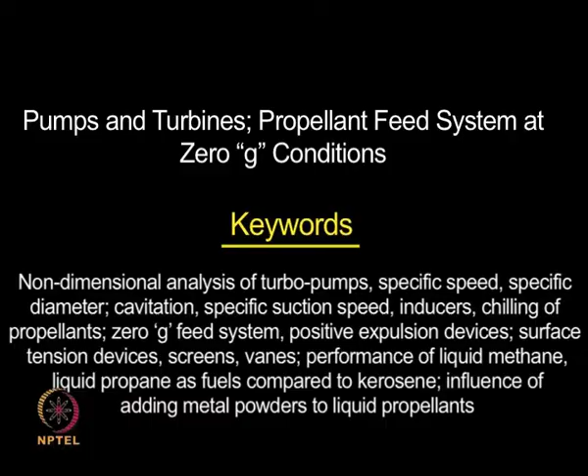Well, good morning then. We continue with what we were doing in the last class, namely we looked at the efficiency of C star due to distribution, then we calculated the time taken for a droplet to evaporate, we calculated the value of the evaporation constant lambda, and we said C star due to evaporation also I can calculate, and the total value of C star due to these two effects is equal to C star due to the distribution multiplied by C star due to vaporization, and this is all about it. You get the efficiencies. I want to spend a couple of minutes on this vaporization.

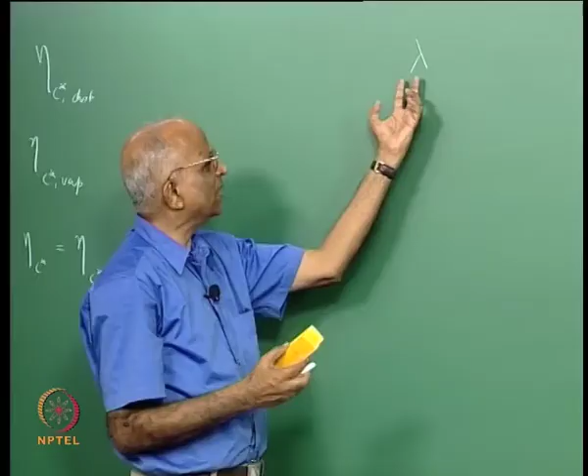See, we told ourselves lambda is a constant, it depends only on the properties of the fuel, and therefore lambda for a given fuel, like kerosene, is around 0.2 millimeter square per second. If I have a hydrazine droplet in a hot medium, it is almost 4 millimeter square per second. I can get the value of lambda. I can therefore say the time taken for a droplet is d naught square divided by lambda. d naught square has units of meter square, lambda has units of meter square per second, therefore d naught square by lambda gives me the value of vaporization time. And the question of lambda, the evaporation rate constant: why do I call it a constant?

We find d d square by dt is equal to lambda, which I call the evaporation rate constant. It does not depend on any parameter, not even on the diameter, it is just a function of the diffusion coefficient, density of the droplet and density of the medium, and therefore lambda tends to be a constant. Therefore, if you go to any lab which deals with combustion, they do experiments, they take a droplet and find out the time taken for vaporization, but then there is a complexity.

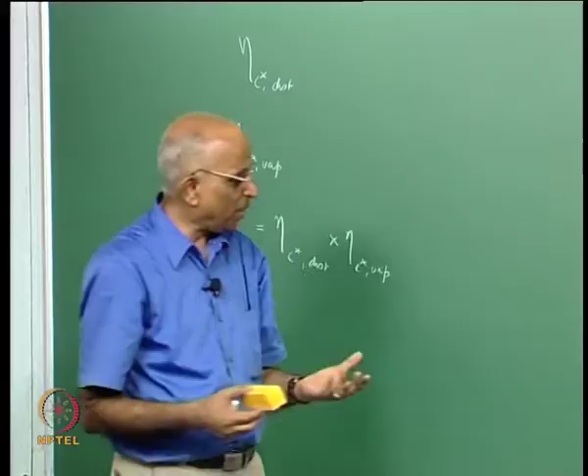This complexity comes whenever I have a droplet in a medium. When the medium is different, the droplet tends to absorb that gaseous medium on the surface, and therefore lambda is not really a constant at different pressures. At low pressures, it is a constant. At high pressures, we did some experiments, in fact one of your seniors by name Balaji did a series of computations on equilibrium at high pressures of liquid surfaces, calculated the value of lambda, and lambda at high pressure tends to decrease.

In fact, his work was published in Physics of Fluids, and that is what we do research work on in combustion: evaporation rate, mixing and stuff like that. We found that lambda decreases at high pressures, but again it picks up at very high pressures, and we also find that at high pressures a droplet may become equal to a gas. In other words, if I were to plot a phase diagram, maybe a T and V diagram, I have the solid line, I have this line which is a liquid line, I have the vaporization line, this is my critical point.

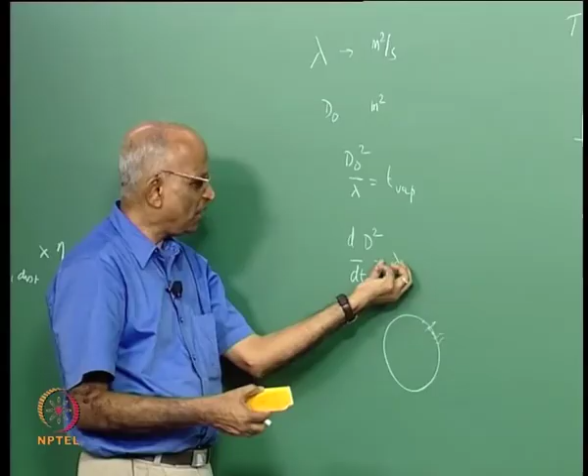When I approach the critical point, and this critical point is not very high, for kerosene in oxygen it could be as low as 50 bar, but I operate my chamber at very high pressures. At that time, oxygen gets dissolved on the surface, the critical pressure increases in this binary medium, and the droplet would still be in the subcritical case. Therefore this question of lambda is important, a lot of papers are written on it, and I think you all should have a feel for it. I think this is all I wanted to say.

I will not go into these details in a regular class, but let us now come to the second point, namely what we have done so far. Let us take a quick summary. We started with tankages. We said liquid propellants are pushed into the chamber. I could have either a regulated gas pressure mode, a pump fed mode, a blow down mode and all that.

Ultimately, what I did was bring the fuel and oxidizer into the chamber, we looked at the efficiencies, we looked at the chamber, we have already looked at the nozzles, but what we have really not looked at is some of these pumps and turbines. In a gas generator cycle, we said I increase the pressure and then I pass it over here.

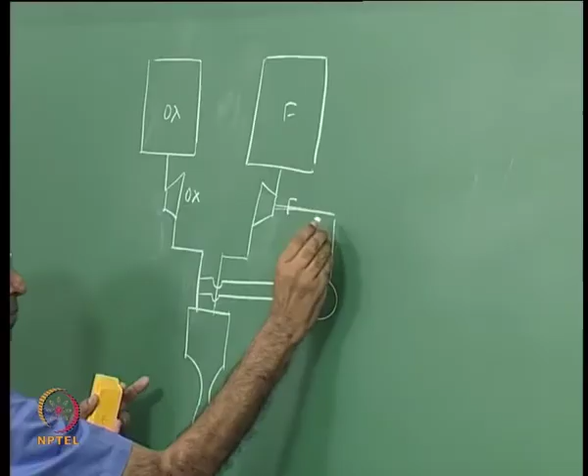Similarly here, what do I do? I put a pump over here and pump the liquid - maybe this is oxidizer liquid, this is fuel liquid, this is oxidizer pump, this is fuel pump. Then what did we do? We bled some amount of oxidizer and fuel, burnt it in a gas generator, and drove the two pumps by putting the gases into a turbine. I expanded the gases in the turbine, reducing pressure, generating power to drive the pumps. When I took the exhaust gases and put them back into the chamber, I called it staged combustion; when I allowed it to exit through an auxiliary nozzle, I called it a gas generator cycle.

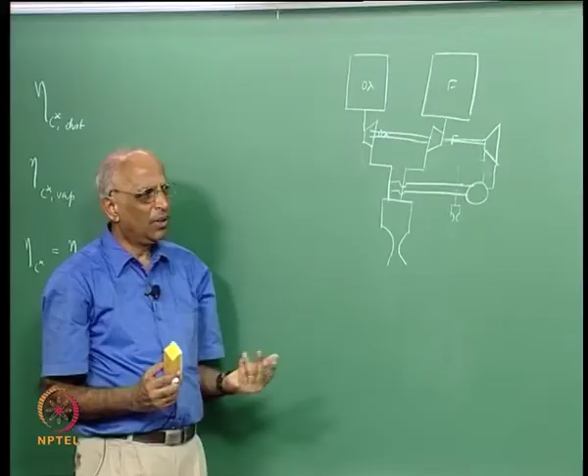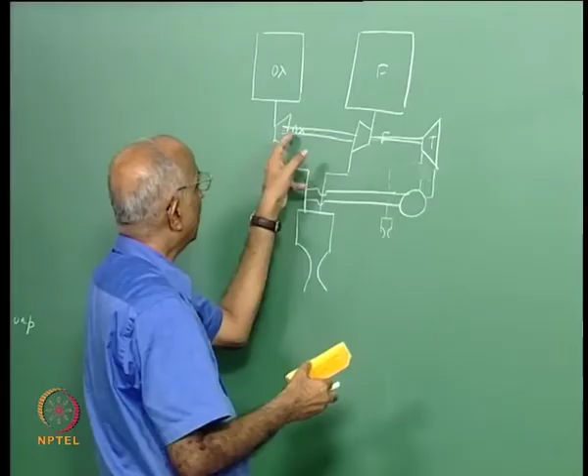So I should spend some time on these pumps and turbines. Normally the turbines we use are of the impulse type. Impulse type means velocity - I convert the enthalpy into high velocity gases. I have the enthalpy of the gases at the exit of the gas generator, at the inlet to the turbine, and at the outlet of the turbine. This enthalpy difference is converted into velocity, which impinges on the blades, rotates them, and drives the pumps. So the turbine is generally of impulse type.

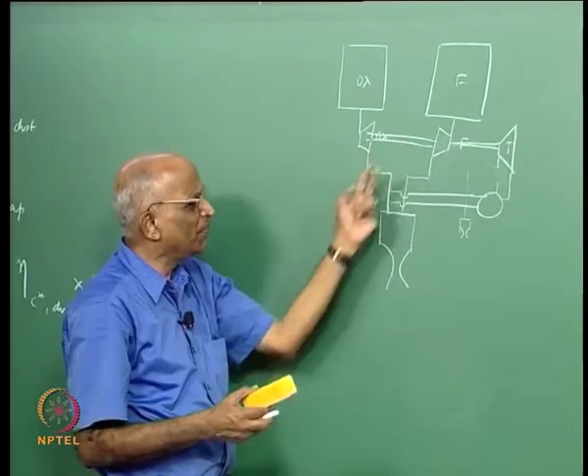Then I have the two pumps. If they are for a small engine, it could be a centrifugal one where I have small flow but need high pressure. It could be a series of axial flow pumps, or a combination of centrifugal and radial and axial. Several possibilities exist for a pump. If you go into details of pumps and turbines it becomes an exercise in turbo machines, which I won't go through, but I want to do some justice to pumps and turbines.

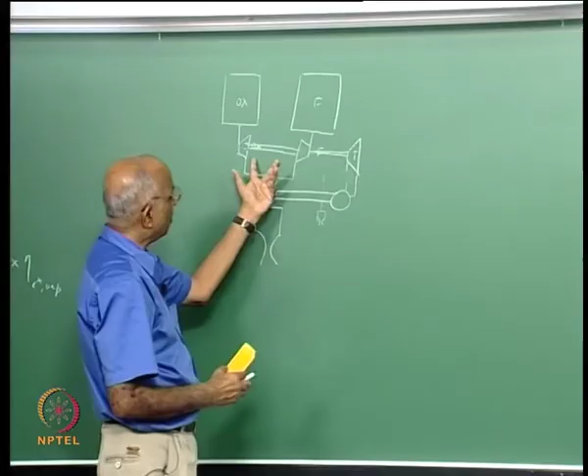So what is a pump required to do? A pump must generate some pressure. What are the parameters in a pump? Maybe the speed of the pump, n rpm - pumps generally rotate at very high speeds of the order of 20,000 to 60,000. In fact, a new engine called Vinci runs at almost 1 lakh rpm. Why do we need high rpm? My dimensions must be small, so my speed must be large to get high pressure. So one factor is n rpm.

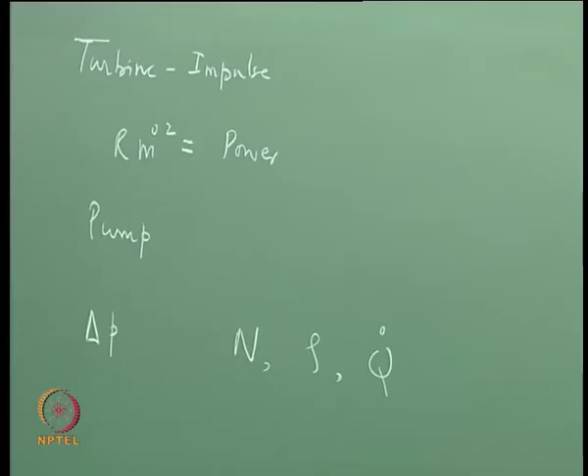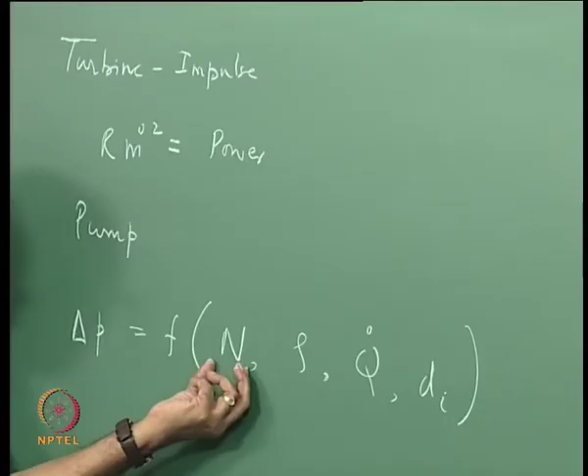What are these 5 parameters? Delta P across the pump, the density, the flow rate, the speed - instead of writing n rpm, I put it in terms of radians per second, omega, where 2 pi n equals omega. And the last parameter is the diameter, d.

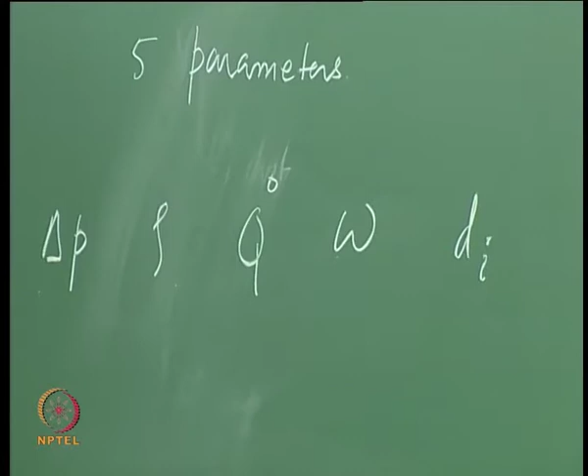Now I want to find the influence of all these things on delta P and vice versa. How do I approach a complicated engineering problem involving a number of parameters? Through dimensional analysis - we have to do a non-dimensionalization or dimensional analysis. Let us do this, so we can say we studied pumps through a dimensional analysis procedure.

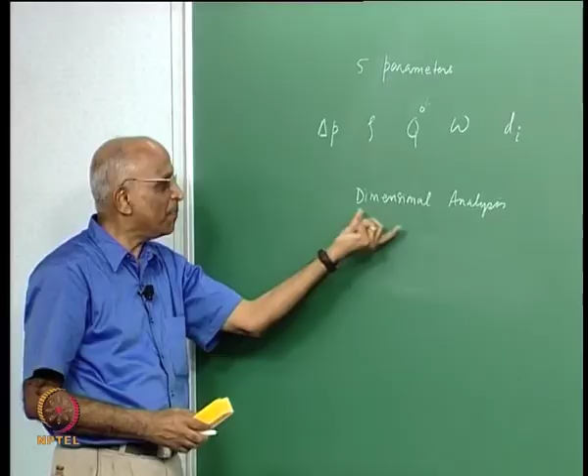In other words, I'm looking at the Buckingham pi theorem, and I have 5 parameters for the problem. The Buckingham pi theorem tells me that if I have a problem involving m parameters with n primary dimensions, I can form m minus n non-dimensional groups.

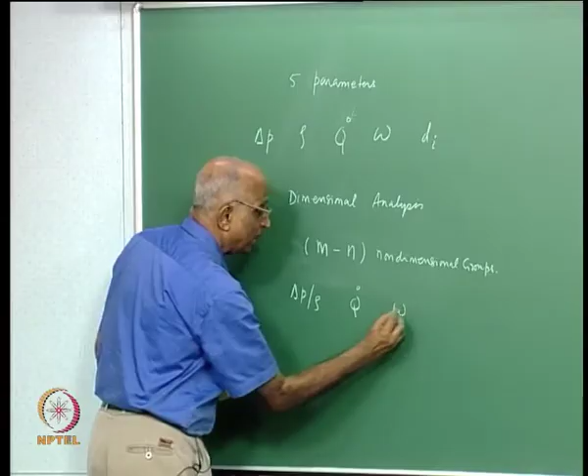Right? This is Buckingham pi theorem. Therefore, what are the primary dimensions I am talking of? Well, when I look at this problem, delta p and rho is a combination. Then I am looking at maybe q dot, maybe omega, and di. Let us put the dimensions out: delta p by rho is Newton per meter square by kilogram per meter cube, but Newton is equal to kilogram meter per second square.

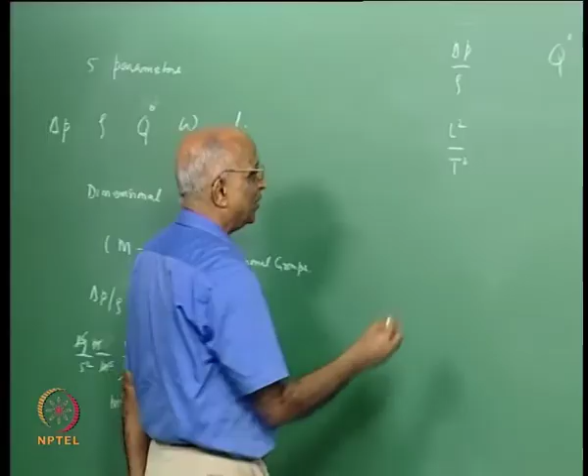Therefore, this gives me the unit as meter square by second square. Let's put down the primary dimensions now. The primary dimensions for this problem: delta p by rho has unit of L squared by T square, length by time square. Q dot has dimensions of meter cube per second, that is L cube by T. Omega is 1 by T, and we have di which is equal to L.

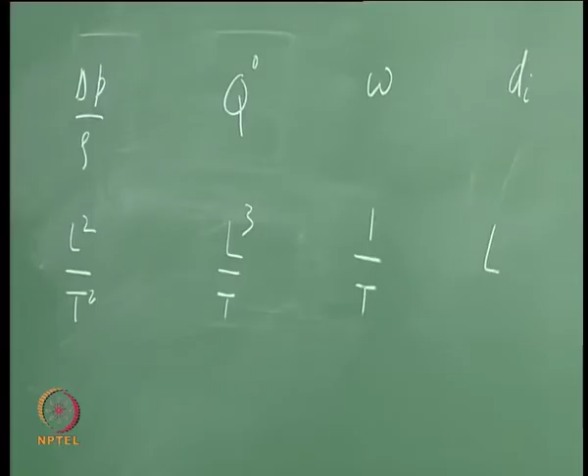See, I was very particular to do this dimensional analysis because in any subject we must know how it applies and we must be able to draw the conclusion, and here also we have a pump which involves some parameters. Therefore, how many fundamental dimensions do you have? L and T alone, that means 2 fundamental dimensions, and the number of parameters I have are 5. Therefore, I should be able to get 3 non-dimensional parameters. For the case of pumps and turbines put together, or let us say a turbo pump, I want to develop pi 1, pi 2, pi 3.

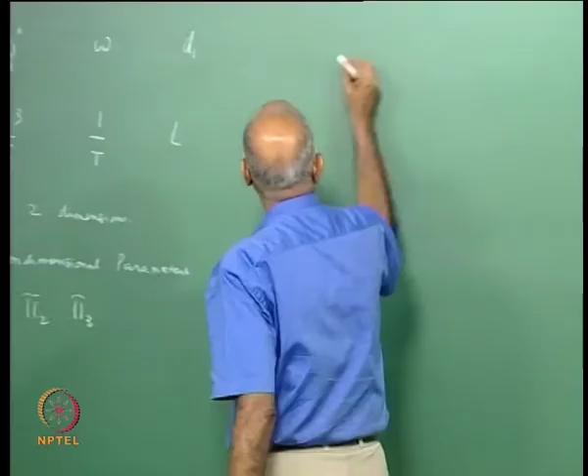Then let's derive these pi 1, pi 2, pi 3, and then try to analyze, and let's see how we can describe a turbo pump operation and how to go about making a turbo pump. Well, I go back and look at the problem. My 5 parameters are delta p, q dot, omega, di, and rho. Even without doing a non-dimensional parameter, I can say delta p by rho v square has units of pressure, and therefore one non-dimensional parameter could readily be delta p by rho into omega square di square.

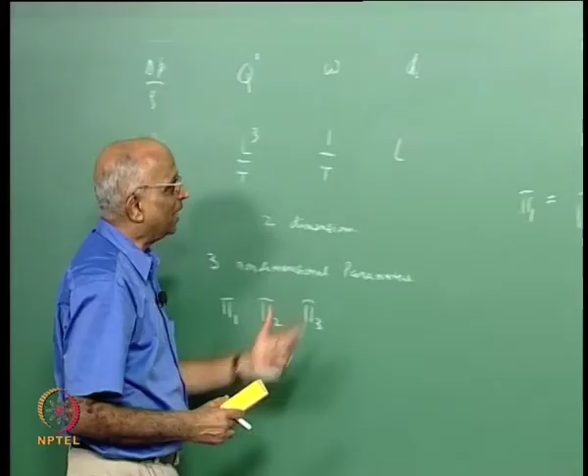Just by observation. Why is that? I know rho v square has units of pressure, kilogram per meter cube, then again meter square by second square, this gives me Newton per meter square. Therefore, let's do one by observation, and let's do one by detailed analysis. Delta p by rho can be put in terms of a non-dimensional parameter, delta p by rho omega square di square, which is my first non-dimensional term. Let us do the second non-dimensionalization with q dot.

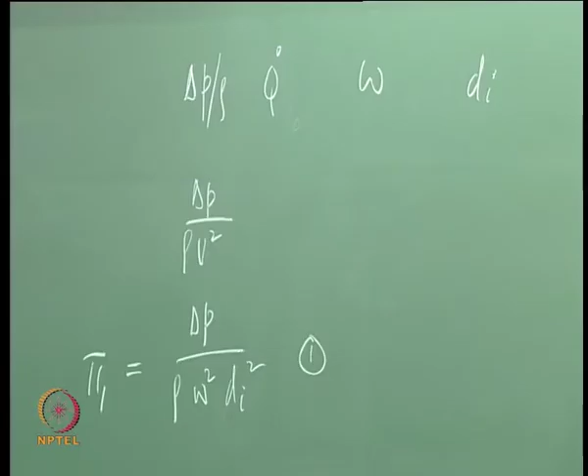I have q dot, then I say, well, delta p by rho should also cause variation in q dot. Well, I have omega, I have to some extent already taken di in this, so let me put di as equal to 0. Let me not consider di, not being influenced, or rather I am looking at non-dimensionalizing the value of the flow rate in terms of, let us say, delta p by rho to the power a into omega to the power b, which I want to write as pi 2, because I am going to separately look at di a little later. If I were to look at this, what would I get? Should I really take this over here, or should I take something over here? Why should omega come over here?

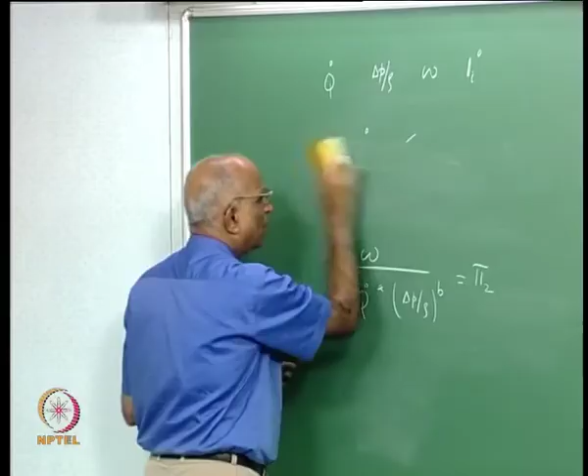Let me consider again, instead of putting q dot, if I am interested in omega over here, and then I put omega in terms of q dot to the power a, and let us put the other term delta p by rho to the power b, this could also be a non-dimensional parameter. In other words, I would like some non-dimensionalizing to be done for the speed of the system as a function of flow rate, and whether I can derive a non-dimensional term here, that means I consider pi 2 to be here rather than this value. If I were to now erase it out and say my pi 2 is going to be here, what should be my value of a and b? How do I do this?

I say omega has units of 1 over t, then q we just now told is units of L cube by t, meter cube per second to the power a, delta p by rho we had L squared by t square to the power b. This should give me a non-dimensional parameter, let us say pi 2 over here, it is non-dimensional. Now what should be my choice of a and b in this for it to be non-dimensional? Let us solve it.

If I solve for L, I get minus 3a minus 2b is equal to 0, because I want the net term to be non-dimensional, not depending on L and t. If I write the equation for t, I get minus 1, then plus a minus plus 2b, bringing t on top, t to the power a and t to the power 2b, minus 1 is equal to 0.

Therefore what do I get? I get 2b is equal to minus 3a. If 2b is equal to minus 3a, I get minus 1 plus a minus 3a is equal to 0, or rather a is equal to half. If a is equal to half, the value of b should be equal to what?

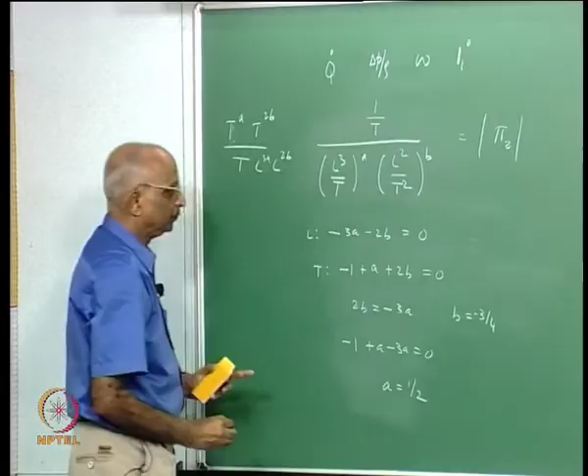If a is equal to half, then the value of b is equal to 3 by 4 minus 3 by 4, minus and minus, that means I am getting, is it all right?

Let us do minus 1 plus a, and 2b is equal to minus 3a, I have taken it on the other side minus 3a, therefore a is equal to minus 2a minus, here I am getting minus 2a minus 1 is equal to 0, that means minus 1 minus 2a is equal to 0, or rather I get 2a is equal to minus 1, therefore a is equal to minus half. If a is equal to minus half, the value of b is equal to plus 3 by 4.

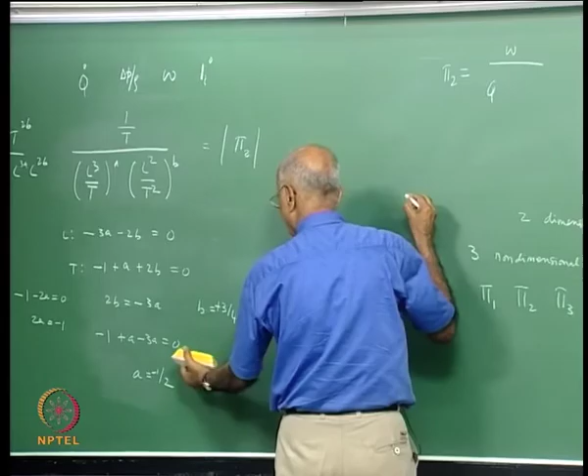Therefore what will be my expression pi 2? Pi 2 is equal to, I get the value of omega on top, this was my q to the power a, which is minus half, and I have b is equal to delta p by rho to the power plus 3 by 4, or rather this tells me that the value is equal to omega root q dot, divided by delta p by rho to the power 3 by 4, and this pi 2 is what we call as a non-dimensional speed or a specific speed.

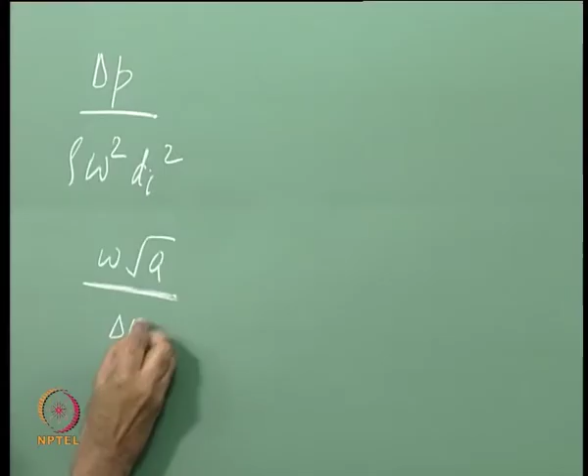Therefore I have got the second parameter. Let us put down the parameters together. The first parameter I said pi 1 is equal to delta p by rho omega square di square. The second parameter says omega under root q dot divided by the value of delta p by rho to the power 3 by 4, which I now call as specific speed.

I do the same analysis for finding out the non-dimensional di, and therefore I do this, and what is it I get? I will not do it in class, maybe you take it as a homework problem. Therefore I take the value of pi 3, let us put it down here, this was pi 1, this was pi 2 which we call as specific speed, the value of pi 3 we will call as specific diameter, and that will come out to be equal to, I just write it out, the same thing we will follow and do it, otherwise it will eat into our class time.

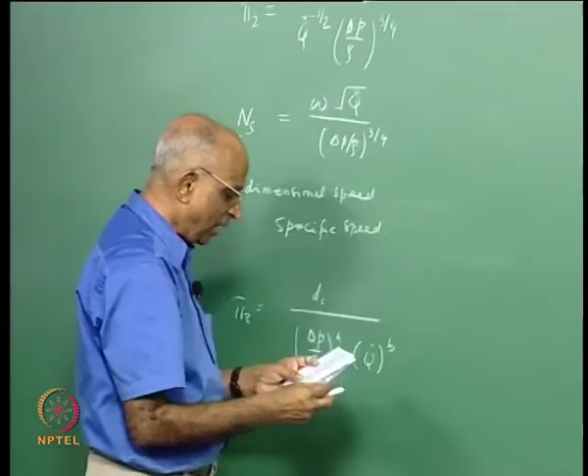We call it as, we do the same exercise, all what I am saying is we will again write di. Pi 3 is equal to di divided by delta p by rho to the power a into q dot to the power b, evaluate a and b for I get a term like this, and the value what we will get is di into delta p by rho to the power 1 by 4 divided by under root q dot, flow rate.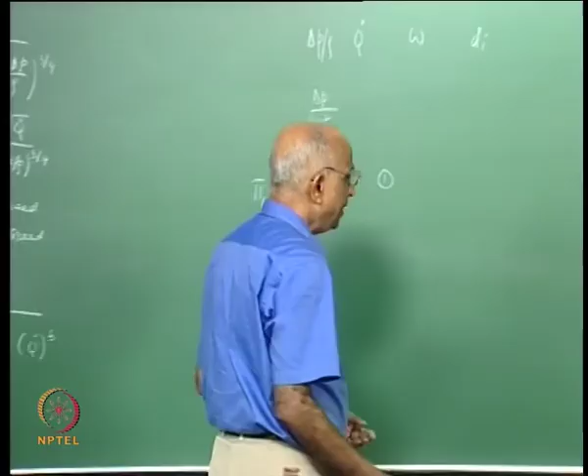Well, these are the three non-dimensional parameters, we call it as ND or specific diameter.

The performance of the pump can be expressed as pi 1, this parameter, as a function of the specific speed and the specific diameter, and this is how we non-dimensionalize the parameter. But why did we non-dimensionalize it?

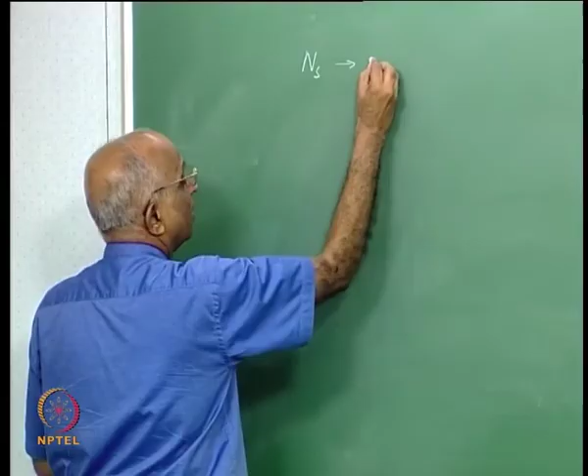Let us take one of the non-dimensional parameters and see what is the impact and why we are doing all this. The specific speed ns is given by omega root q dot by delta p by rho to the power 3 by 4, and I call it the specific speed. If I say the specific speed of a turbo machine is something like 0.6, what does it denote? Why is it so important?

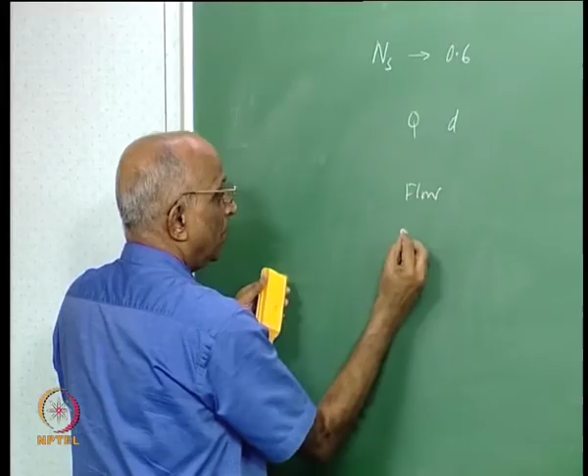This non-dimensional parameter tells me that for a given value of this diameter, if I were to scale up my diameter, I have to scale up the value of q, I scale up the value of the dimension. All I am saying is for a pump having the same value corresponding to different sizes and different values of speed, the flow in the pump and the geometrical characteristics of the pump will be similar.

In other words, for the same non-dimensional number, that is the same speed, if that non-dimensional speed is so much, then I can assume for different values of q, different values of diameter, for a given type, it could be axial, it could be handling a particular type of propellant, or it could be centrifugal, or a combination of some of these things.

For a given axial flow machine handling a particular set of propellants, if I keep on varying the quantities and vary the size of it, and if I get across a given number over here, the number is invariant. It shows that between the different types, that is one category of, let us say, an axial pump, if the size is varied,

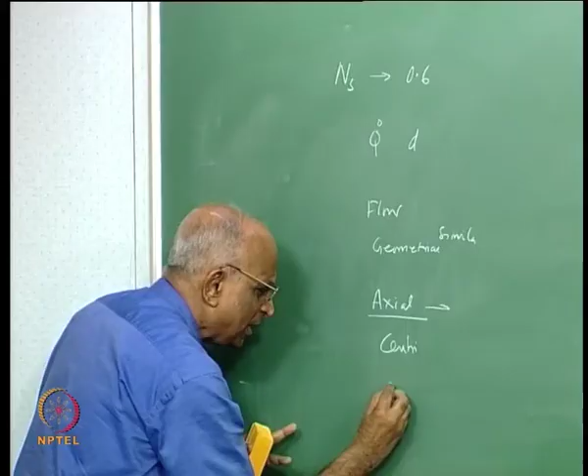automatically q and d will get varied and speed will vary, q dot and d will get varied. But if the specific speed is the same, the flow characteristics and the geometrical similarity will be there. Therefore in all the pumps and systems we use, for a given, let us say, cryogenic pump, if it is axial flow, it will have ns between a small range of values.

If I were to say the nd, that is the specific diameter, it will have a small range of variables. Therefore, if I have to scale up a cryogenic pump still using the axial pump, I will go ahead and design for this particular value of specific speed. Therefore these non-dimensional parameters are powerful because they allow us to determine the range of operation of a particular system.

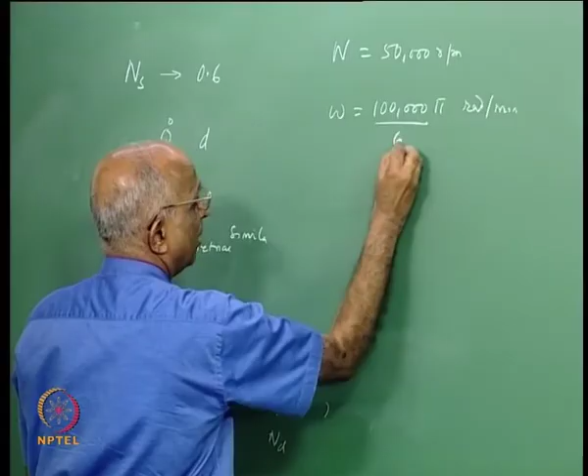Like we said, the speed of a pump may be 50,000 rpm, so omega is equal to, let us say, 100,000 pi radians per minute. To convert it to radians per second, I divide it by 60 and I get so much radians per second.

And therefore, for this radians per second, if I were to get the equivalent value of ns, how did I get the value of ns? I get omega, and for that particular machine or pump, I find out the flow rate, I find out the pressure head developed by it, and I get the value of ns.

Now if I were to design another pump which has to cater for a much larger flow rate and a different size, if I get the same value of ns, well, the flow characteristics, that is the nature of flow in the system, the hydraulics in the pump, and also the geometrical characteristics will be similar. Therefore, for a given type of pump, let us say axial pump, for a given type of propellant, the ns will fall in a very small range, maybe 0.6 to 0.7, and therefore these numbers are useful.

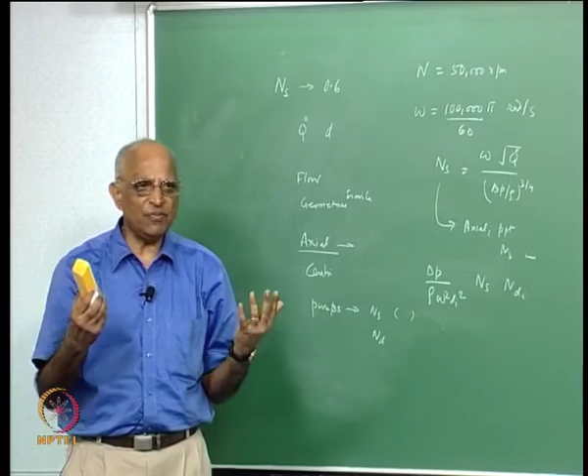Also the performance can be written in terms of ns, in terms of nd, in terms of delta p by rho omega square into d square, and this is why non-dimensionalization is useful. Whenever we plot the results of pumps and turbines, we always plot it as a function of specific speed. Anyway, it's one number in terms of delta p versus specific speed, and that is how the performance of pumps is measured.

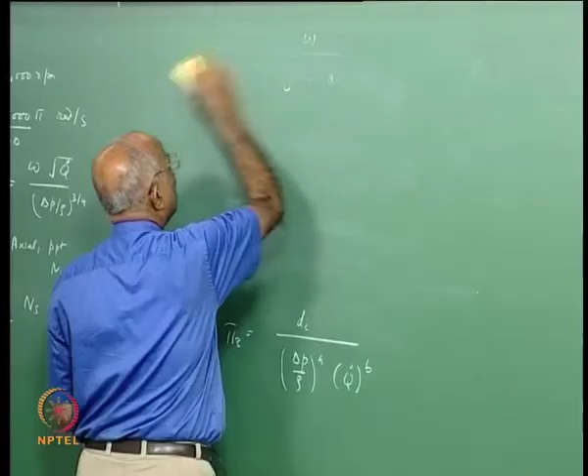This brings us to the next part of our talk. We looked at the pumps and turbines from a non-dimensionalizing point of view. The question is, what are the characteristics, what are the problems with pumps?

We told ourselves, I take the propellant from a tank into a pump. I cannot have high pressure in the tank, maybe the pressure here is, let us say, 5 atmospheres, which is the upper limit. Now I feed the propellant into the pump here and take the outlet from here. This is inlet, this is outlet.

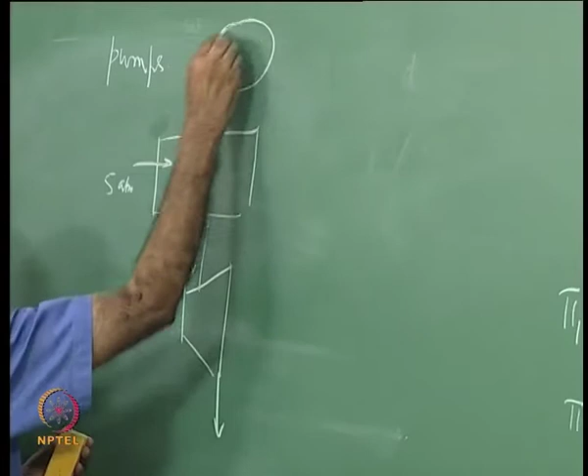There is a maximum pressure at which I can supply, because I have to carry a gas bottle here. If I have to increase my pressure, I have to increase the gas, which is not possible. Therefore, my pressure at the inlet cannot be high.

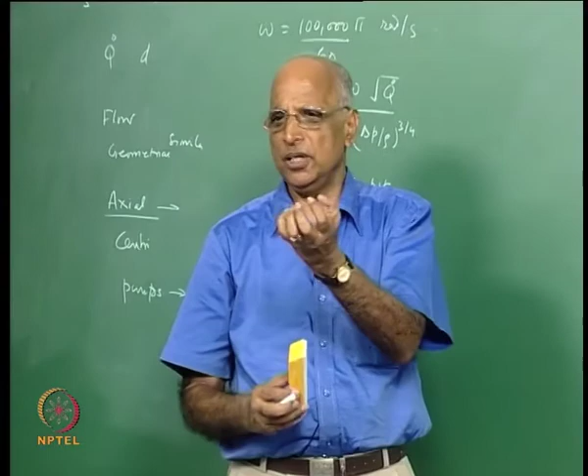Now if the pump is to rotate at very high speed, the velocity of the blades will be high. If the velocity of the blade is high, then the static pressure will be low. If the static pressure falls below the vapor pressure, bubbles of vapor are formed, and these bubbles will harm the blade. It will immediately go. We are rotating at high speed, and these bubbles hit the blade, and the blade gets damaged.

Therefore, the pump is subject to cavitation, and in any pump it is necessary for us to reduce the cavitation. To eliminate the possibilities of cavitation, how do we eliminate it?

My supply pressure, or the stagnation pressure at supply, which I call P naught — we are talking of a case when the maximum could be 5 atmosphere — minus the vapor pressure should be a large number, right? But this number depends on the speed of the pump.

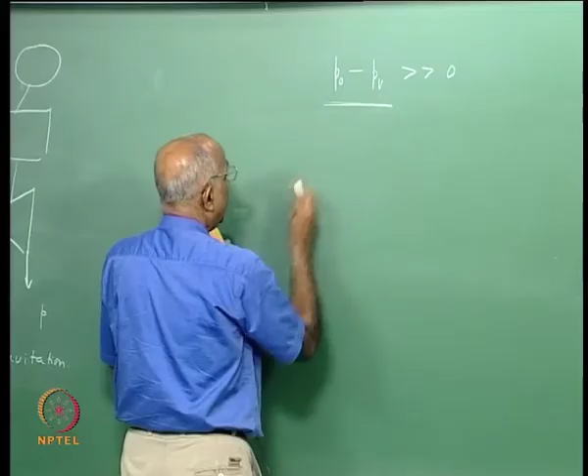If omega is larger, well my PV is the same. What happens is the static pressure reduces to this value, and therefore my cavitation would start. This number becomes extremely important, and we call it the net positive suction head, given by P naught minus PV, which must be a large number for any pump.

Is it clear? Why we say I would like the net positive suction head — that is P naught minus the vapor pressure, which we call net positive suction head equals P naught minus PV — or I can write this net positive suction head in terms of rho and g as P naught minus PV by rho g, which is the head, the net positive suction head.

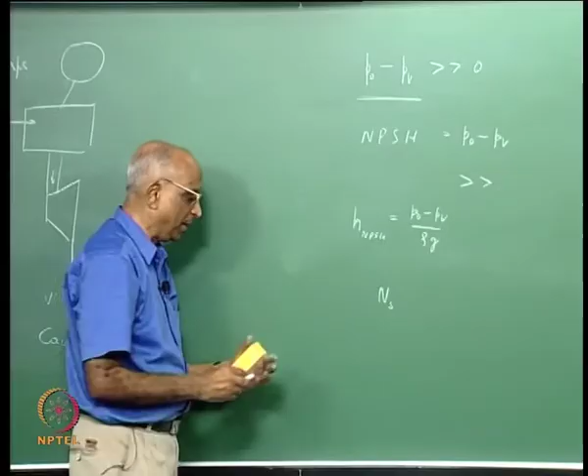And if I take this head, which I know for cavitation needs a reasonable number, and substitute it into the non-dimensional parameter pi 2, which we call specific speed — what was specific speed equal to? It was equal to omega root q dot divided by delta p by rho.

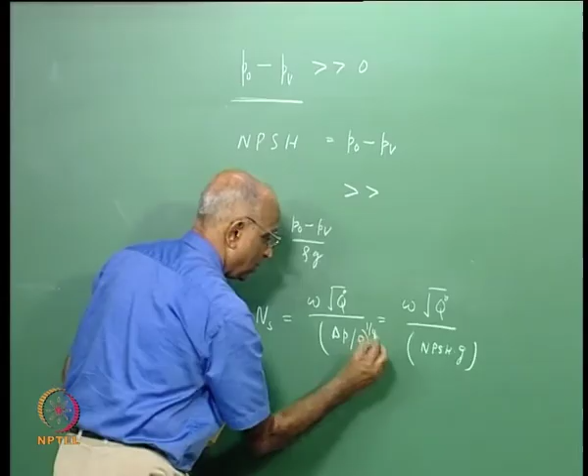I substitute delta p by rho, whatever I am getting at the pump inlet, as equal to something like omega root q dot divided by net positive suction head into the value of g, to the power 3 by 4 — I'm sorry, I gobbled that up. This value is what is referred to as

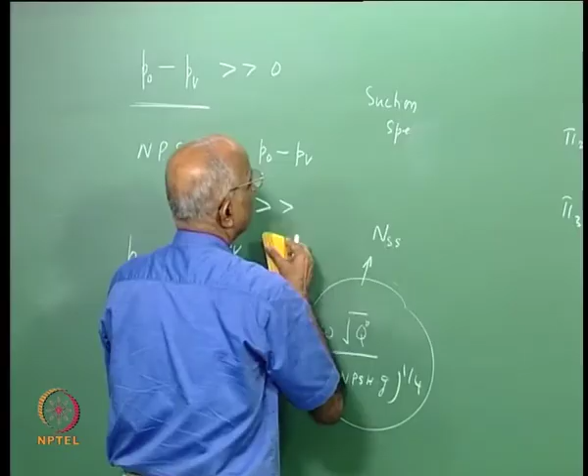NSS, that is, the suction specific speed for preventing cavitation. This head value must be such that cavitation does not occur, and we say this is equal to a non-dimensional number with respect to cavitation. We call it, instead of writing it as NS, which was the specific speed, we say suction specific speed, NSS.

Now, all what I am trying to say is cavitation is an important parameter. We would like the net positive suction head to be large, and this NSS gives you an idea of what we need to do to make this a large number, or rather the specific speed must come down under the suction conditions. We tell ourselves, well, I would like the value of P naught minus the vapor pressure to be a large number. How can you make this?

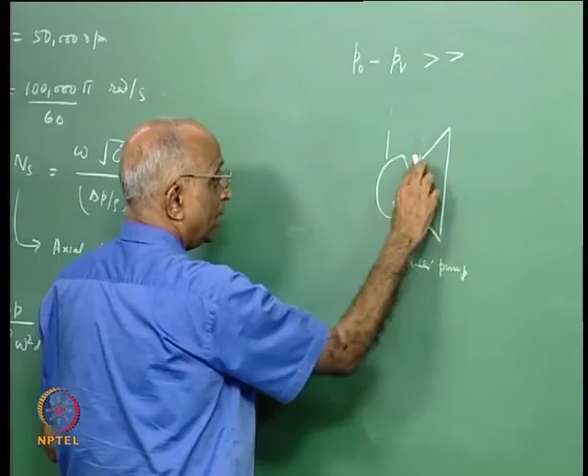Either the tank pressure must be increased, or else if I can subcool my liquid, the vapor pressure comes down and I can still get a larger number. Or the third thing is, before the pump — I have a pump like this, I supply it — before the pump I put another pump which I call an inducer pump, such that when the main pump is rotating at very high speed, I get a higher value of P naught. That means I can improve the net positive suction head.

By the following three: either provide high pressure tankages, which is not the correct solution, which is not possible. Second is lower the temperature of the propellants, in which case I reduce the value of PV, or I put something like an inducer ahead of the main pump.

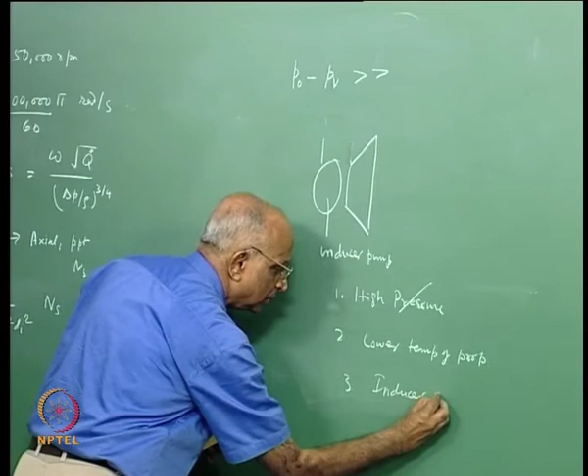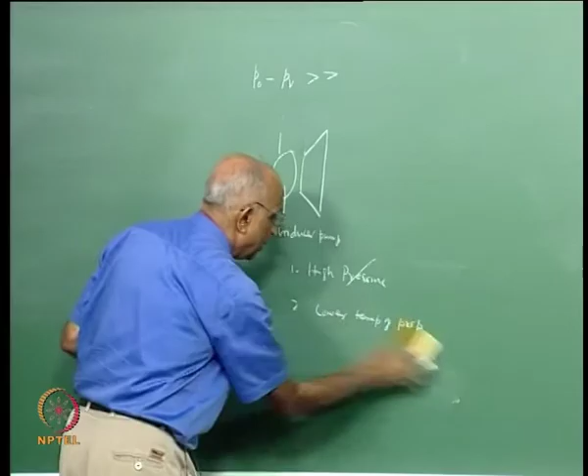Therefore, people who work with liquid propellant rockets will talk of an inducer ahead of a pump, and this is the reason why it is done. I think this is all about turbines and pumps. We reduce the problem to one of non-dimensionalization. We talked in terms of a specific diameter, we talked in terms of a specific speed, and said there will be similarity when the non-dimensional parameters are the same, and we will be able to quantify the performance, and normally the performance is always expressed in terms of these non-dimensional parameters.

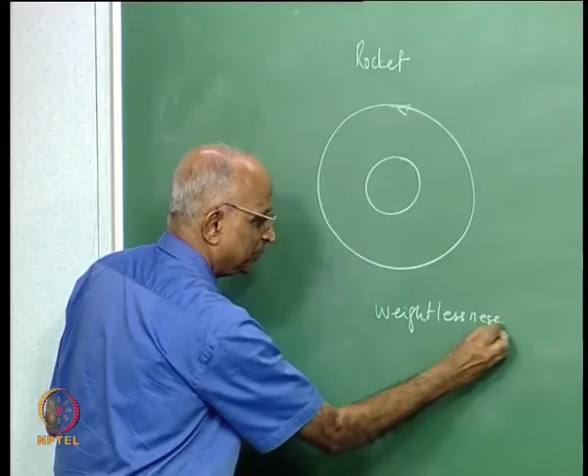I think with this background of turbines and pumps, let us come to the last topic, and I have been telling you earlier, whenever we have something like a rocket which is going up, and one of the functions of rockets is, maybe you have the earth, the satellite must go around the earth in some orbit, and we said orbits are something like freely falling bodies. We also told ourselves all freely falling bodies have a problem in that they are in a state of weightlessness, right. Is it clear? We talked about it.

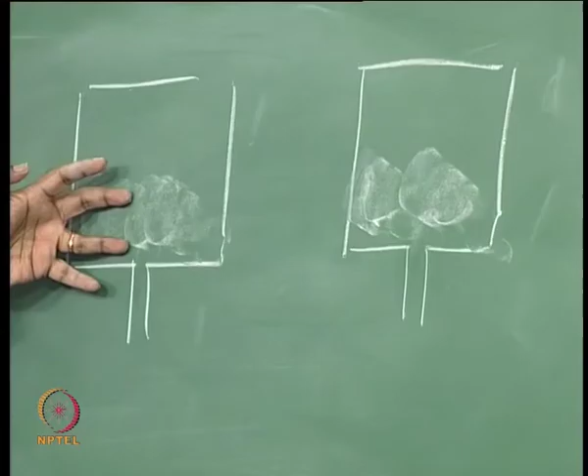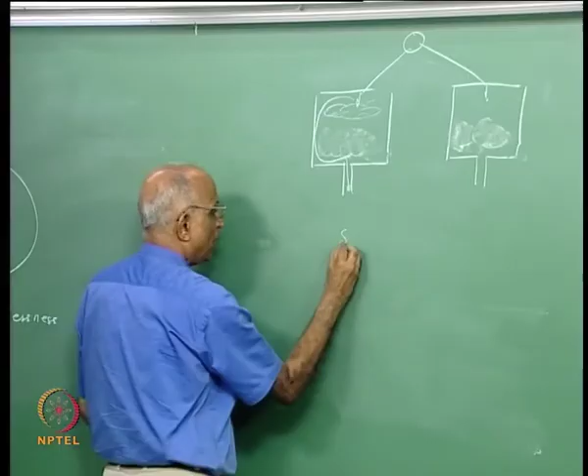Then now the question comes, I have a propellant tank, maybe a liquid fuel tank, an oxidizer fuel tank. Well, the liquid is at the bottom of the tank. I have a drain port through which I am drawing the liquid. If the rocket, as it is going with the satellite, or when the rocket is moving up, is just coasting such that it is again in a state of weightlessness, it is not powered, then the liquid is not going to be at the bottom here, it could be anywhere, it could be distributed anywhere. And if it is distributed anywhere, even if I put a gas over here and push the gas to push the liquid, gas will come out through this rather than the liquid. Therefore, supply of a liquid under the conditions of, let us say, weightlessness is something to be taken care of.

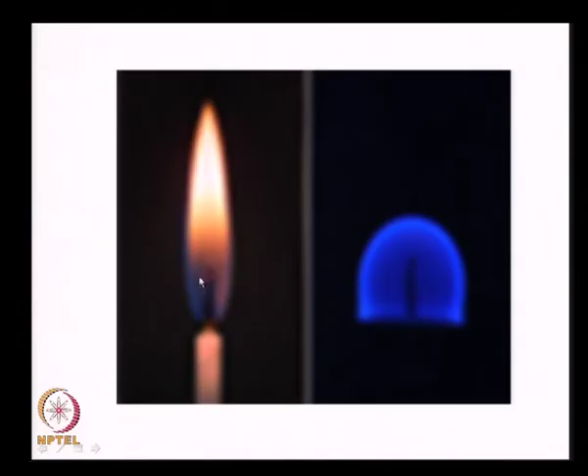All of us being in combustion, this is how a candle flame looks like on ground, but if the same candle I light when it is in a state of 0 G, that is weightlessness, I get a beautiful picture like this. That means there is no buoyancy, because buoyancy depends on gravity. Since there is no buoyancy, the flame is beautifully a hemisphere over here. And this is the state, and therefore let us now come back to our problem of how do I supply propellants when I am in a state of weightlessness, and that is something which we have to do.

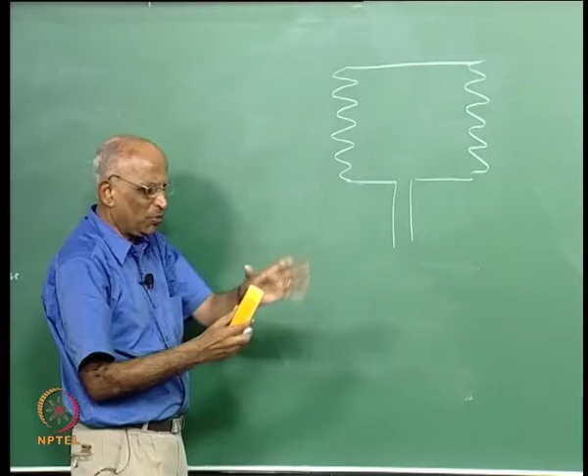You have something like an elastic material, like the football bladder, something made of rubber, something like this harmonium in which we compress things. That is a diaphragm, and this is something which gets squeezed. I put this in a propellant tank over here, and enclose the propellant completely within. Now I pressurize it with a gas, and this compresses the diaphragm, and the diaphragm as it compresses

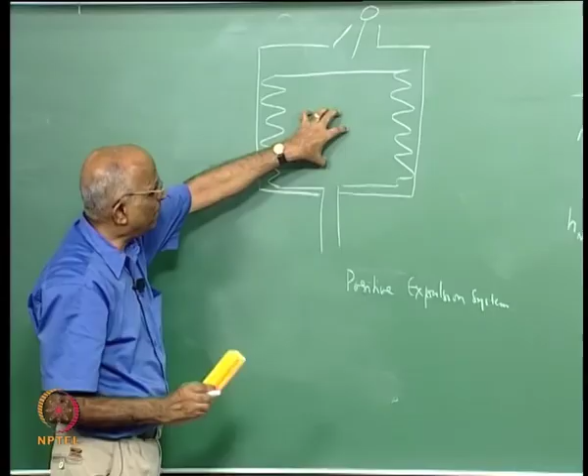keeps flowing. That means I contain the liquid positively, and this is known as a positive expulsion system. I cannot leave the liquid free. I have the tankage, but within the tankage I must put a diaphragm, and in the diaphragm I store the liquid fully. There is no gas at all, no vapor at all, and I positively push it through and the fuel gets expelled either into a pump or directly into the thrust chamber. That means both my tanks will consist of a diaphragm, which is a positive expulsion system.

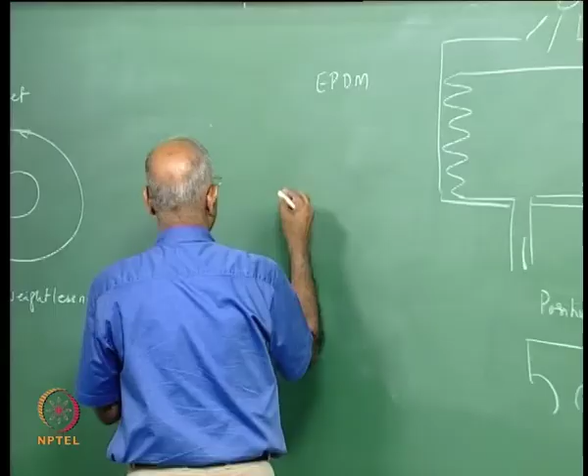Now the diaphragm must be a very flexible material. One of the materials used is EPDM rubber, which is more or less universally used. What is this EPDM? It is a rubber type, known as ethylene propylene diene monomer.

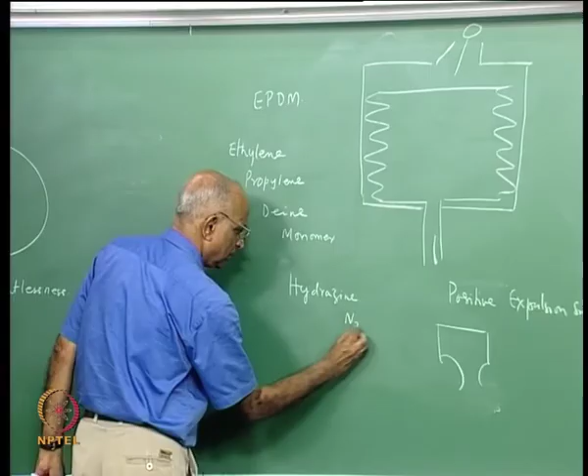Why this rubber is chosen is that most of the upper stages, or let us say the rocket stages used in spacecraft, use the fuel hydrazine, or MMH, monomethyl hydrazine, which is a hydrazine-based fuel. This particular diaphragm material should not get dissolved in it, because if it gets dissolved, even trace quantities may affect the performance later. We will study this maybe in the next class, wherein I will deal with monopropellant thrusters.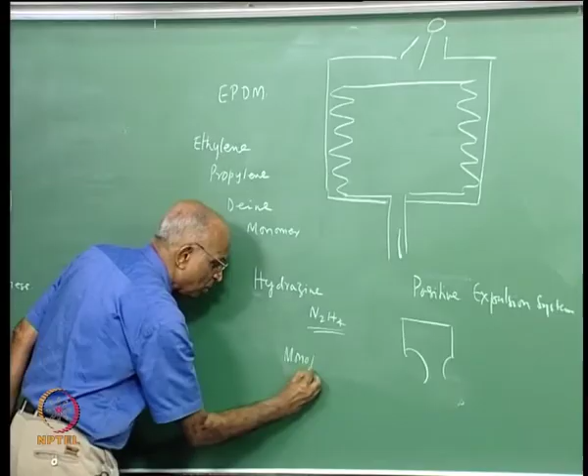A single propellant, can I use it for a rocket? What happens is, this will go and poison the catalyst, and the catalyst will degrade, and therefore the general tendency is to use EPDM rubber for the positive expulsion system. But the positive expulsion system has its own problems. You have this rubber diaphragm material, and it occupies a volume, with the result that the usable space is not fully used. That means the entire tank space cannot be filled with the liquid; I am losing something.

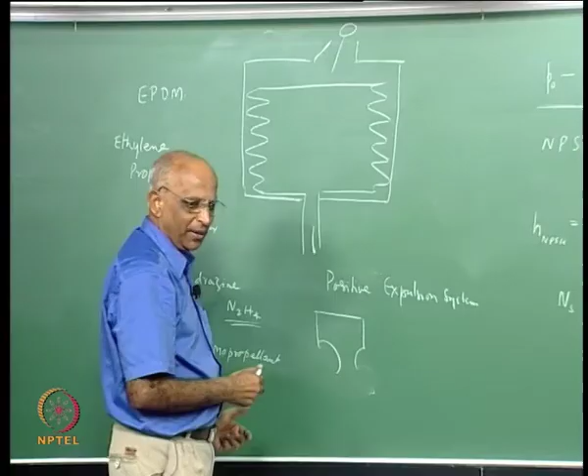Therefore the current trend, or what I must say is the more recent generation, by more recent I mean for the last 15 years or so, if not more, is to use surface tension devices for feeding propellants, liquid propellants, let us say at zero gravity conditions.

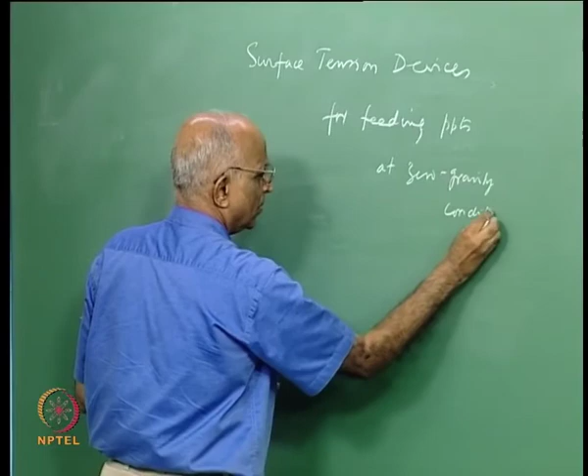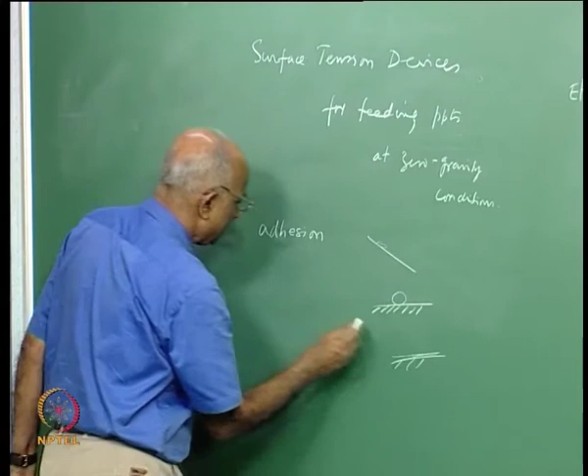All of us know what surface tension is. A surface, when wetted, things stick to it. Why does something have to stick to the surface? Well, you talk in terms of adhesion. I have a surface of a metal, I put a mercury drop, and the mercury drop stays as a drop; it does not smear on the surface. If I put water on a surface, it smears. That means surface adhesion takes place. In the mercury case, something like cohesion takes place. We do not want cohesion, but want the liquid to spread.

It is not only the properties of the liquid, but the properties of the surface of the material that are equally important. For instance, water spreads in a glass tumbler or in a glass vessel, but the same water does not spread on a lotus leaf. That means we are looking at surfaces, and how do I make use of surface tension to overcome this problem? Well, I can think of the following.

Let us do a small exercise. Supposing I make a sieve, that means a series of cross wires like this. Let us say I make spherical holes over here. I dip it in water, and the water is retained over here. How is it retained? Let me sketch it: I have a series of holes here, and now I pour water, and the water just sticks to the surface.

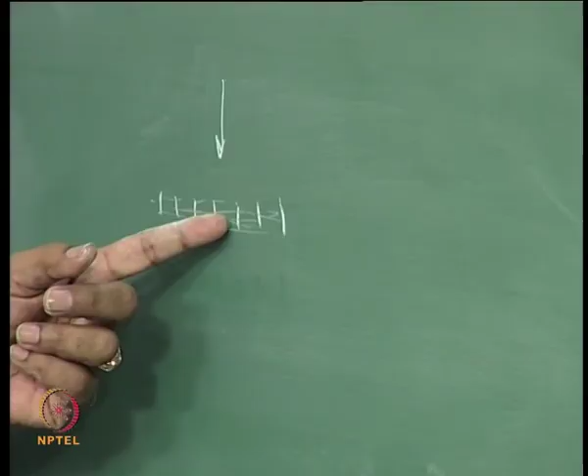Now I push air over here. Maybe there is a value of pressure drop across this before which air cannot even enter it. That means I must overcome the surface tension pressure. Surface tension has units of Newton per meter, and it wets the surface. I take an individual hole, the diameter is d, and the surface tension is sigma, let us say Newton per meter, into d is the value. Now I push air into it; the force of the air being pushed in is equal to P into pi by 4 d square.

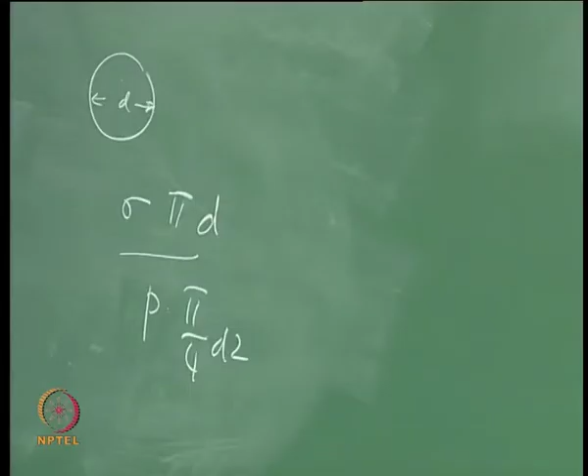This is the perimeter, so this should have been sigma into pi d. This particular diameter can hold a pressure such that, with d cancelled, p comes on top. So p equals 2 sigma by d, or rather 4 sigma by d, or 2 sigma by r — and therefore this is the pressure.

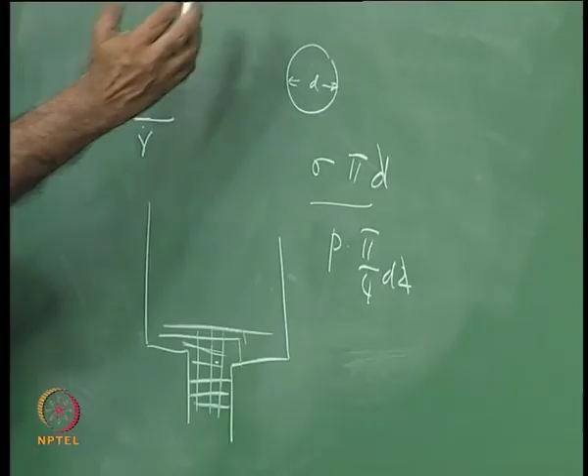If I make some compartments here of a particular diameter, and have a tank like this containing a series of meshes, the liquid in these meshes stays there whether under gravity or not, since surface tension does not depend on gravity — it is just a pressure force at a surface. I make sure the gas pressure will not permeate through by choosing the diameter of these holes appropriately, so that this is always wet.

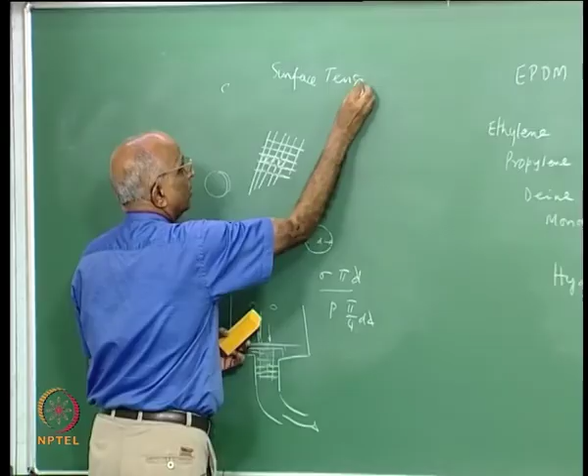Whenever I want to supply a propellant, it is available. When I supply the propellant, a thrust gets generated and the propellant comes over here. These are known as surface tension devices for supplying fuels at zero gravity.

Let us take a look at some of them. This was what was done, but then I have a tank. I can also use these things for dynamic pumping. Let us say I have a tank like this. I put some devices like vanes on the surfaces, and I enclose and contain this.

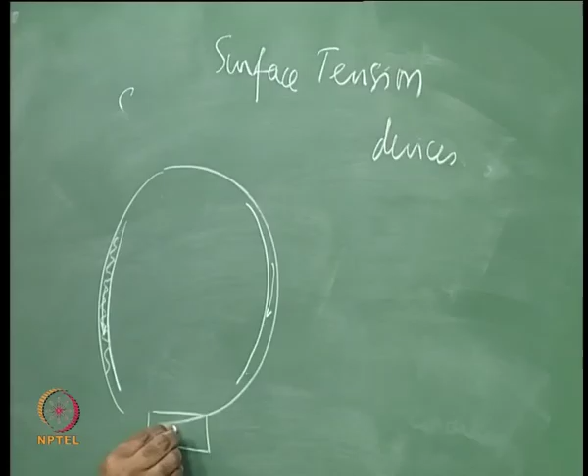I shape the vanes such that the pressure here is lower than the pressure there. In other words, the flow of propellant takes place, and I collect it in a surface tension device, then supply it. These are known as vanes — let us take a look at them as used in some spacecraft.

This is my area wherein I contain these screens or openings such that the fluid is retained there. These are the vanes through which fluid comes over here. This is another view — maybe I have the vanes over here. This is the vane I am talking of, this is the gap, and this is where the sieve collects the propellant and feeds it into the chamber.

These devices have high expulsion efficiencies, meaning most of the propellant can be expelled, unlike in the case of the positive expulsion system. This is all about surface tension devices.

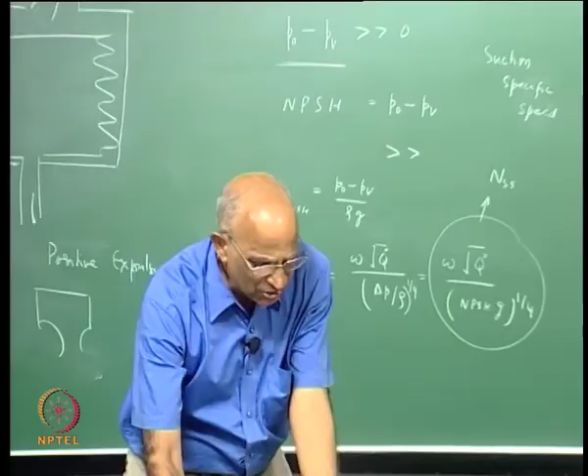I think we have more or less covered liquid propellant rockets, considering the different elements. Just to recap one small part — we talked in terms of specific impulse, mixture ratio, and different propellants. The propellants we did not consider were liquid propane, liquid methane, and liquid ethane.

When we compare the performance of liquid oxygen and kerosene, we find kerosene has lower performance than these cryogenic fuels, like liquid propane which is normally a gas, and liquid methane which is a gas. People are trying to work on whether these propellants should be used in future missions, but it has still not become operational.

The last point is, when we consider a solid propellant, we added metal to improve the specific impulse. But if we try the same with liquids, the molecular weight of the products goes up, and putting metal in the propellant rather than improving performance does not give the same advantage as with solids. Therefore, metal in liquids does not seem to be a solution.

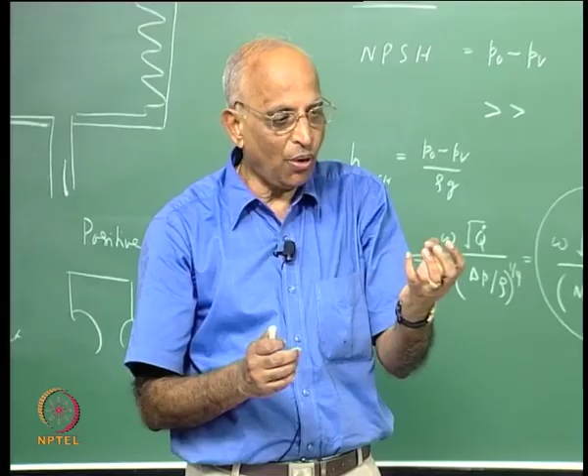The first point is the higher molecular weight of the exhaust. Second, metals require more time to burn, and sometimes the metal forms an oxide, but unless that oxide releases heat, I do not get the energy — that is why I gave you that assignment, where with dissociation we calculate the products of combustion. It will illustrate the different types of problems we have.

I think this is all about liquid propellants, and we have covered more or less all of it. In the next class, I will talk in terms of monopropellant rockets and hybrid rockets, and then get into the problem of combustion instability. Well, thank you then — I think that is about it.